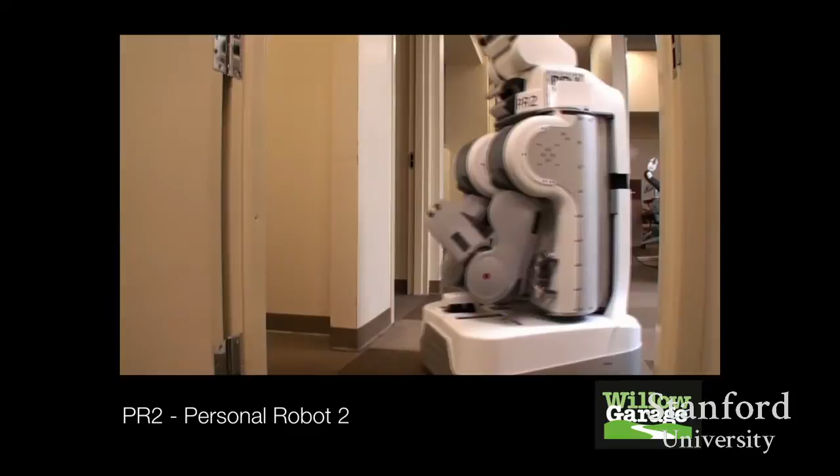This is the PR2 in action, a video probably about 4 years old now, showing at the time the visualization of how it was building a map. You can see the navigation. One of the fundamental rules of robot navigation is just don't hit anything, don't hit anybody. At Willow Garage there were dents in the walls, but they were from teleop - it was very rare that the robot would hit something while driving itself. You can see there's a lot of visualization tools.

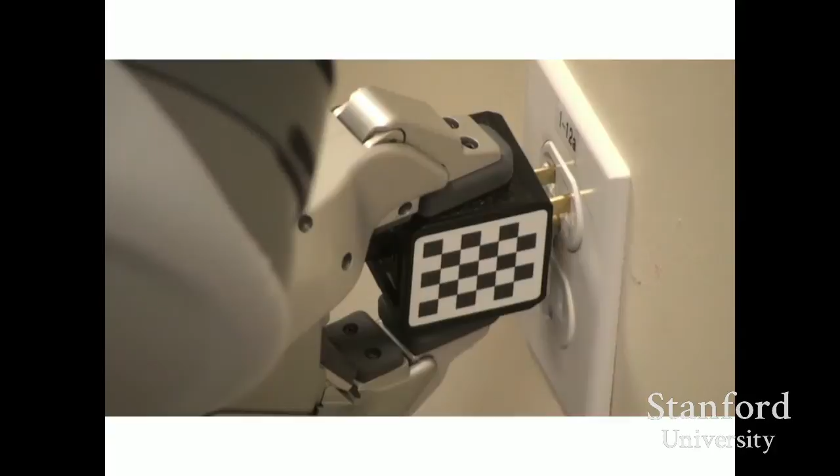The tour de force for the PR2 in the early days - we called it milestone 2, after we got the robot navigating - was getting it to plug itself in. This is not the right way to charge a robot; you should build a dock, that's the engineering solution. But if you want to prove the arms can do a very precise task, this is kind of a cool thing to do.

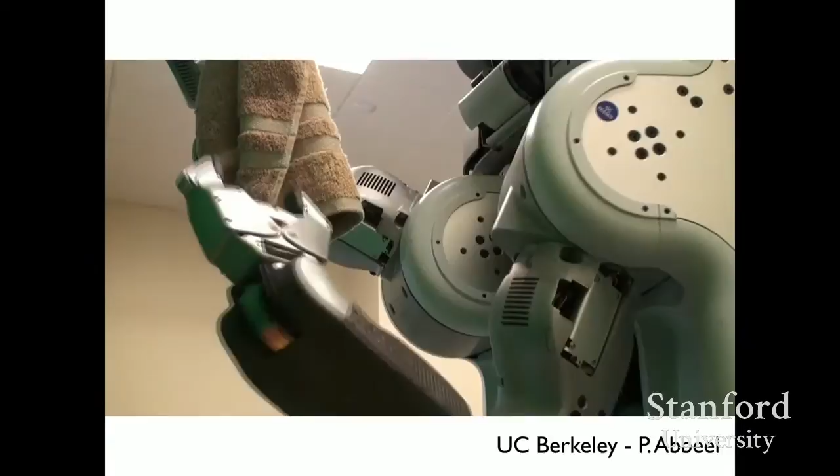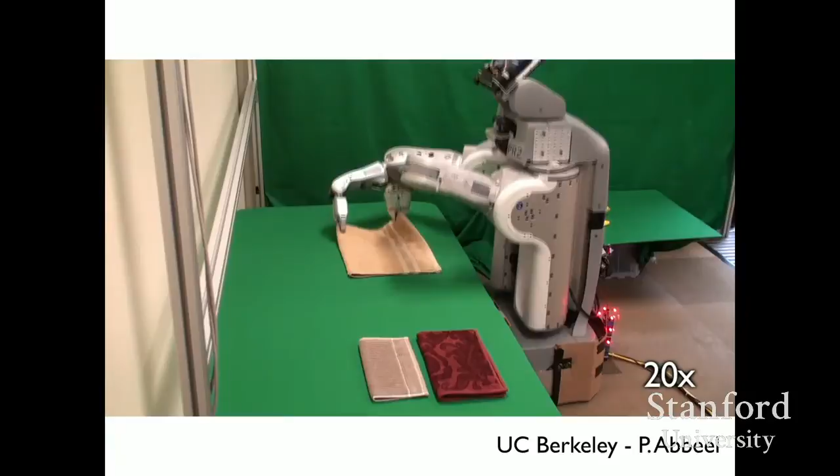That was the beginning of PR2. When we had a working prototype, Peter Abbeel's group at Berkeley got the robot to fold towels. This is how they did it - you get the robot to pick it up by a corner, and eventually do this. If you want a lot of hits on YouTube, which this video did, you do this move right coming up here - you just go like this, and people go 'wow, that's cool, it must be human, it knows to get the things out.' So this was a pretty cool thing.

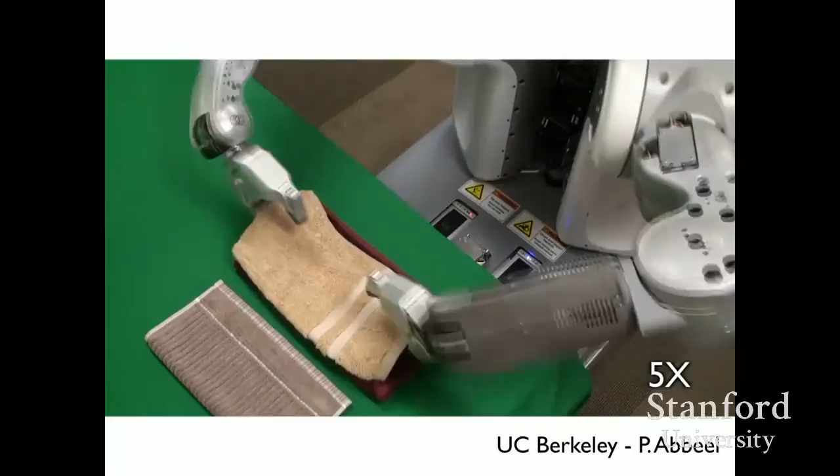This robot - one reporter who covered it said it could do 25 towels a minute. That was inverted; it actually did 1 towel every 25 minutes. It's a pretty important difference. Peter's since gotten that down to under 4 minutes per towel, which is a huge improvement compared to 25, but still not taking anybody who folds towels for a living out of work.

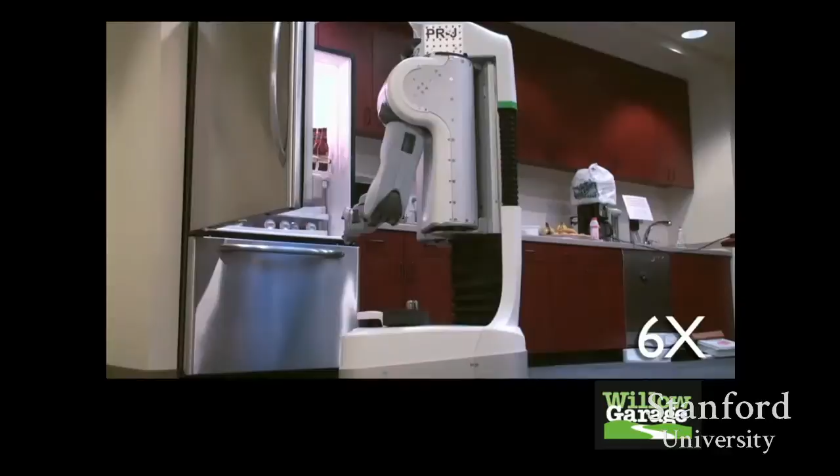This was another tour de force at Willow Garage. Once we had the robot and the first version of the robot operating system, we said, can we make it do the thing all graduate students want - get a beer out of the fridge and bring it to me. They made a little web interface where you told it what kind of beer you wanted. If you pick a Guinness, it picks out the Guinness on screen. If you pick Bud Light, it pops up a dialog box asking 'are you sure you want Bud Light?' So it's a very smart robot.

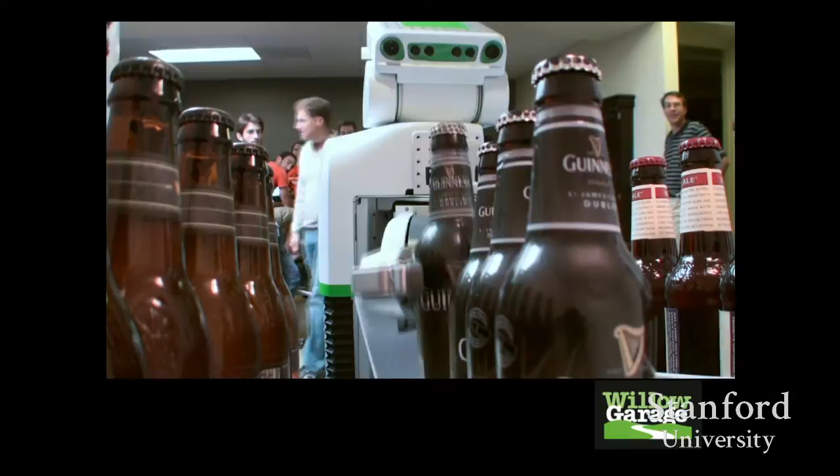Then it uses the navigation technique - they actually added a little cup holder there. The cool thing about this was it was a 1-week project, 8 engineers. So we take the underlying platform and say, go do this. We did another project, which I won't show the video right now, called Pool Shark, and you can see it on YouTube.

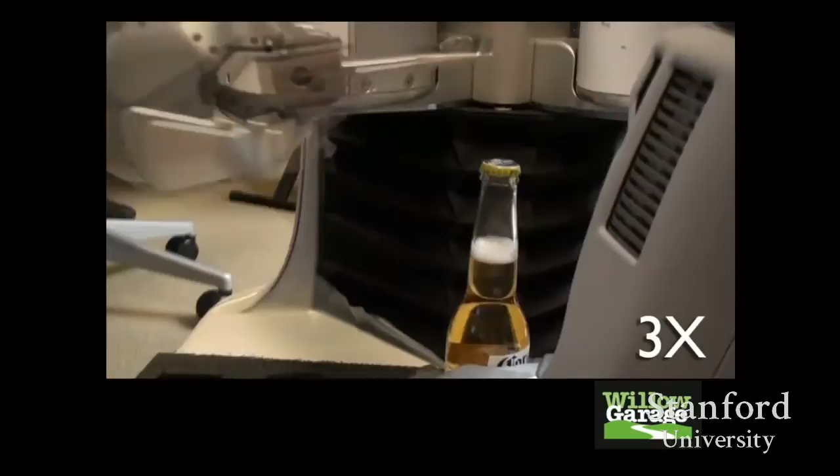Pool Shark was another one-week hackathon: get the robot to play pool in a week. They used an open source pool physics simulator to do that. Pretty cool. They also got Coors Light, or Corona I guess - Corona's okay - and they made a mess. That was a cool thing there.

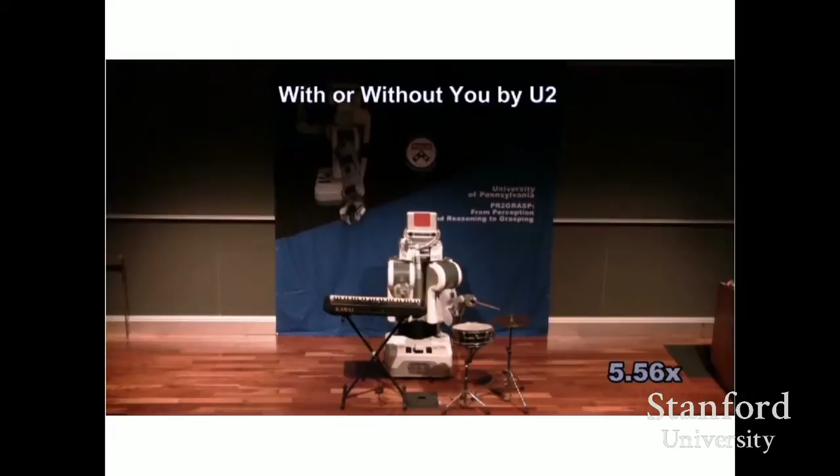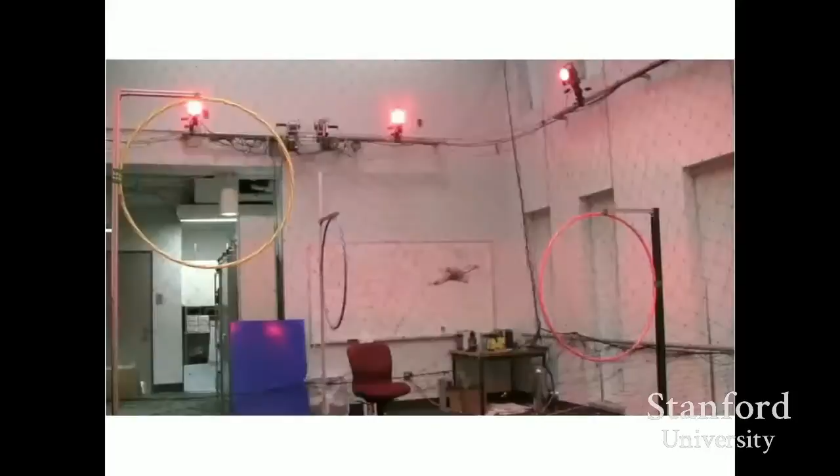This is all built on software called the Robot Operating System. You'll see a bunch of these - this was a weekend project to get the robot to read MIDI files and play, at University of Pennsylvania. You see a lot of different robots here. These are KUKA arms on top of an obviously homemade base. These are early drones at University of Pennsylvania doing some cool things inside a motion capture system so they could get position.

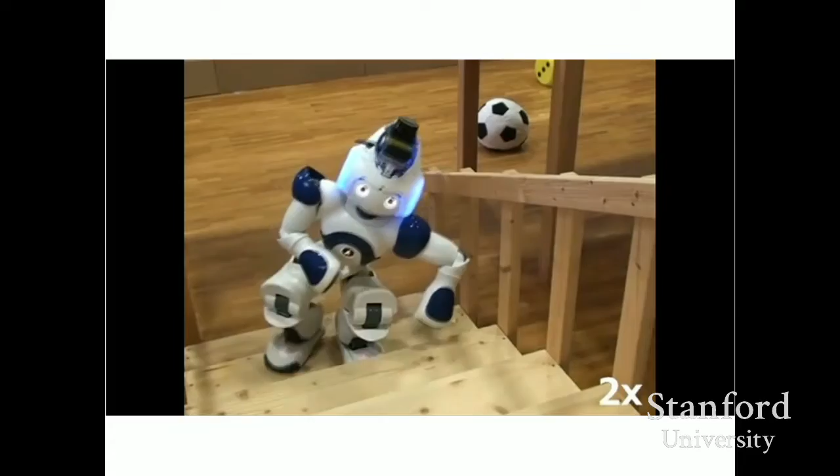This is here at Stanford - Morgan Quigley's building a robot arm. This is that Nao robot I mentioned earlier, but using ROS to navigate. Dancing with a robot out of Germany called the Care-O-bot. This is out of Zurich, robots that go through pipes.

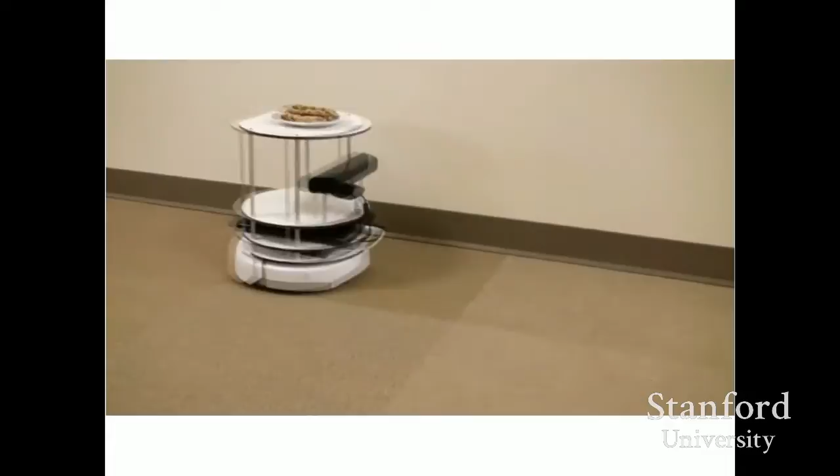This is a TurtleBot, sort of the lowest cost ROS robot that we built at the time. This is Lego Mindstorms, but you had to run ROS on a separate computer, not on board. And this is a robot at Georgia Tech. So you get the idea - there's a lot of research robots, they look a lot different, and what's cool is that this robot operating system works on a lot of them.

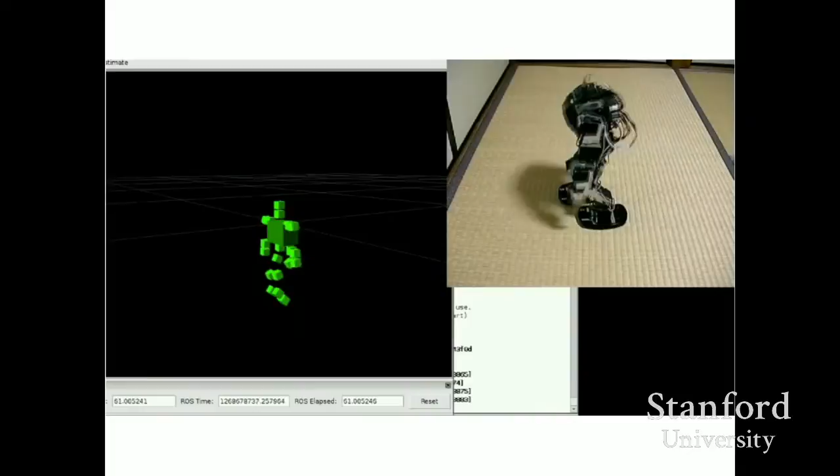So what this means in terms of the point today is that robots are coming online and becoming available commercially for the first time around people. It's not that there haven't been any, but there haven't been very many. I think that's due to technical enablers - ROS, free software that lets you get started.

So we're - Savioke, I'll fast forward a little bit. Savioke is now 16 people, we started as 7 people. We've been in business for 15 months. We've got a robot in the field and 2 more. We built hardware, we had software, we got the thing working in a year, right? We were at 10 months for the first deployment. That's incredibly fast.

And that's due to ROS, right? That's due to the fact that we can start with a working code base and improve the parts that need to be improved. It's also due to robots coming down in price - that's another reason they're becoming available. The PR2 would be cool, you could have it deliver beers in restaurants, it'd be awesome. At $400,000 a pop, it takes a lot of creativity to justify how you're going to make money at that in a restaurant.

And then cheap sensors is a big deal. We built the PR2 - we put a stereo head and a structured light sort of projector that put out a light pattern, so you could do essentially what the Kinect does. But we built that custom - that was probably a $4,000-$5,000 BOM part of the robot, very expensive. The Kinect came out for $150, and they sold millions and millions of them. That's the good news. The bad news is Apple bought PrimeSense, which makes the Kinect, so they're not as easy to find now. But the technology is coming to the point where it's now consumer products.

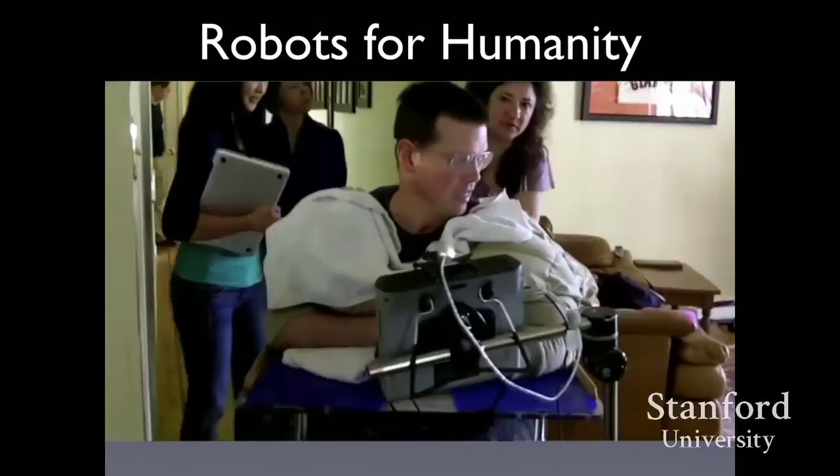This is probably the best thing that came out of Willow Garage in terms of the robot. People ask all the time, what's this robot for? This is a man named Henry Evans who called us up and said, I saw your robot on CNN, and I think it could be my external body. Henry was a CFO of a Silicon Valley company, had a brainstem stroke about 11 years ago now. And he just called us up.

He types using his head on a keyboard, or he can use that board that he uses to speak to his wife. But here's the clip that he saw on CNN, and he said, hey, can I get access to one of those?

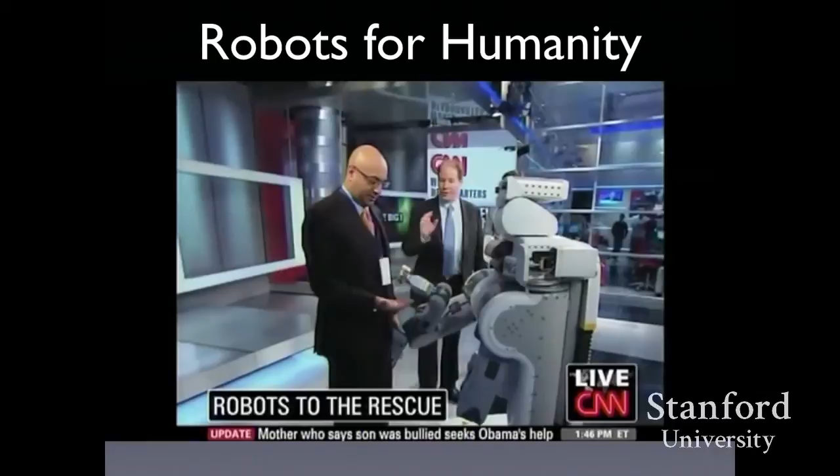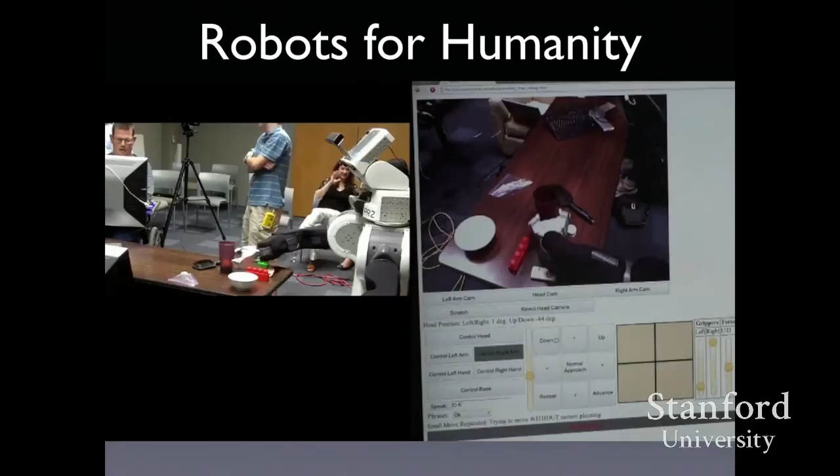And so we started this project called Robots for Humanity, and this is the interface that was built. He actually used PowerPoint to draw an interface, said this is how I want to work it, and then sent us that. We sent it to a Georgia Tech grad student who built the interface to control the robot, and then Henry went and used it. The first thing he did with the robot was turn it on himself, as you can see here.

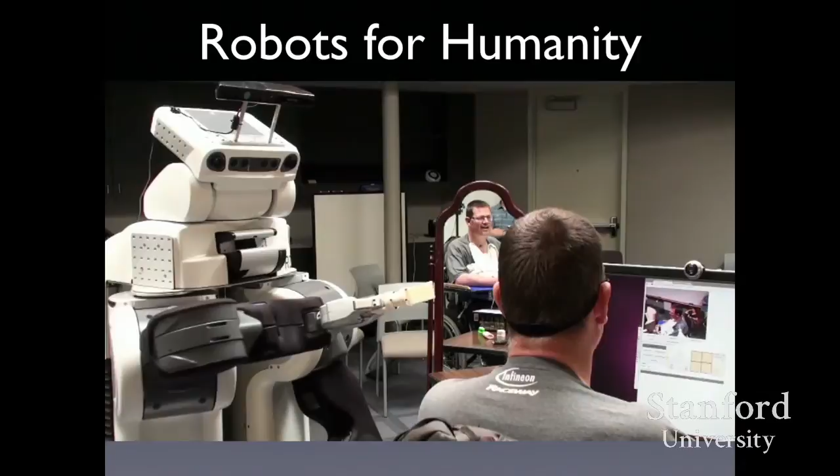And this is a recreation. The first time he didn't have anything in the robot's hand. He put the hand right in front of his face, and we're holding the run stop. What's he going to do? And he scratched an itch on his nose, right? It was the most touching moment.

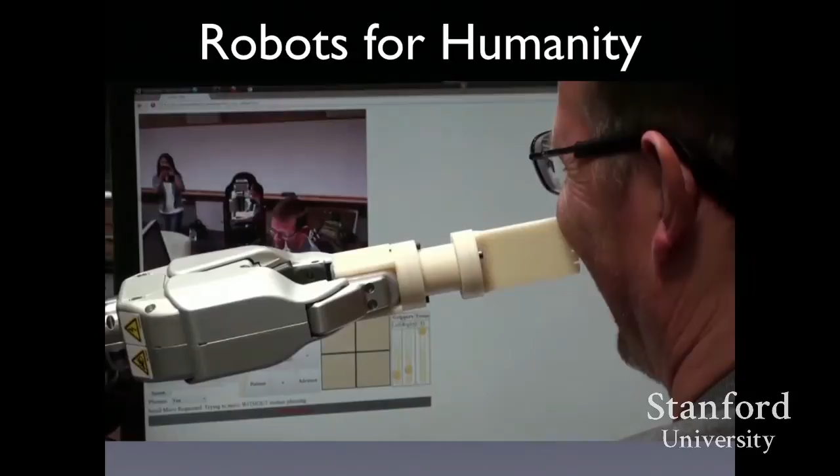Then we said, well, what else do you want to do with the robot? And he said, I want to shave myself. And so you can see here, there's a force torque sensor attached to kind of a razor head. That force torque sensor tells you how hard he's pushing. And so we had his wife shave him the way she normally does, and he shaved himself. He pushes 10 times harder, right? So no wonder he wanted to shave himself. But it's also just about his dignity and being able to do things for himself.

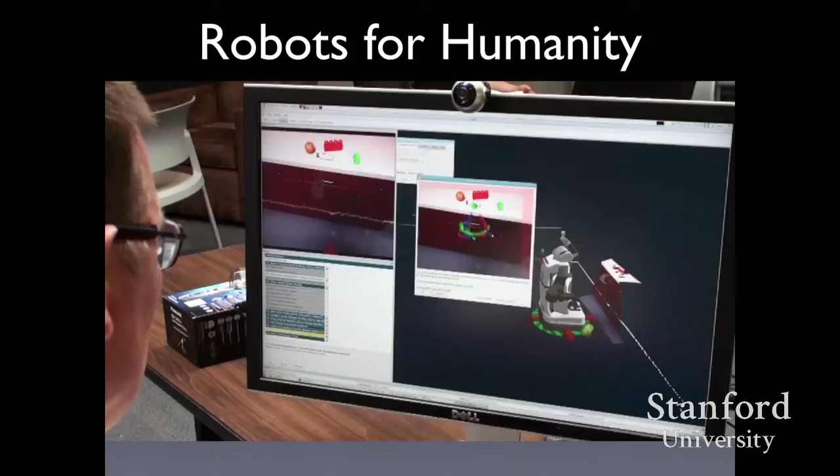So this is him using the robot from a distance. He's in one room, he cannot see the robot now, his eyes are off, he's in another room. The robot's opening a drawer. He's watching it through video feeds, and he's using it essentially as a remote body.

And later we took this robot to his house. He drove it across his home, opened a drawer, took out a towel, brought it back, and used it to wipe his face. Imagine for somebody who's mute and quadriplegic, who can't basically do anything with the world except move his head around, suddenly he's able to affect things.

There was a clip just there of him handing out candy to trick-or-treaters. We did a thing here at Stanford Shopping Center. So this is a project that, as you can tell, I'm passionate about and drives me.

One of the first things we did when we started Savioke, as we were exploring what our project was going to be, we funded a project at the University of Pennsylvania, and they built this robot called ScratchBot. They didn't call it ScratchBot, Henry calls it ScratchBot, so I use that name. This is a carbon fiber robot arm, very lightweight, counterbalanced, designed to be something that's not going to kill him while we're not looking. It's an important feature.

And he uses it basically to scratch his itch, and it's mounted to his table. As you can see, this is his bed at home. He uses it basically every day - he estimates he gets an itch 20 times an hour, something like that. So you can imagine how long you can wait before you just want to scratch. He has some signal with his eyes that he uses for his wife to scratch, but it's not a favorite thing to have to ask for that. He's much happier doing it himself. And you can see he really goes at it.

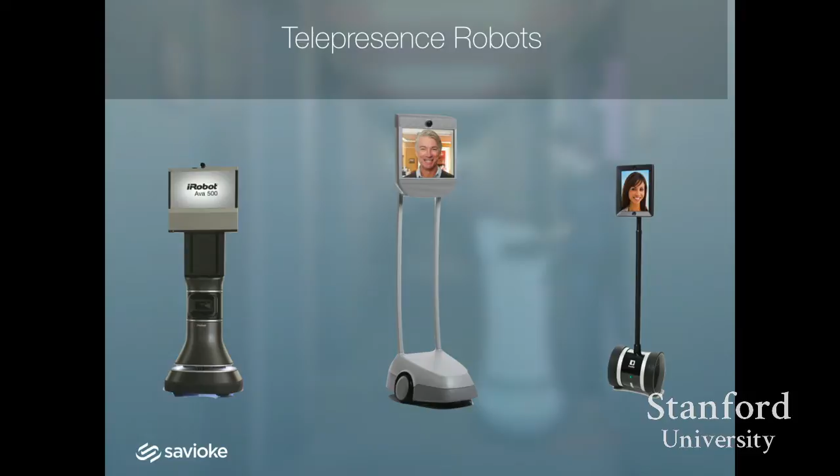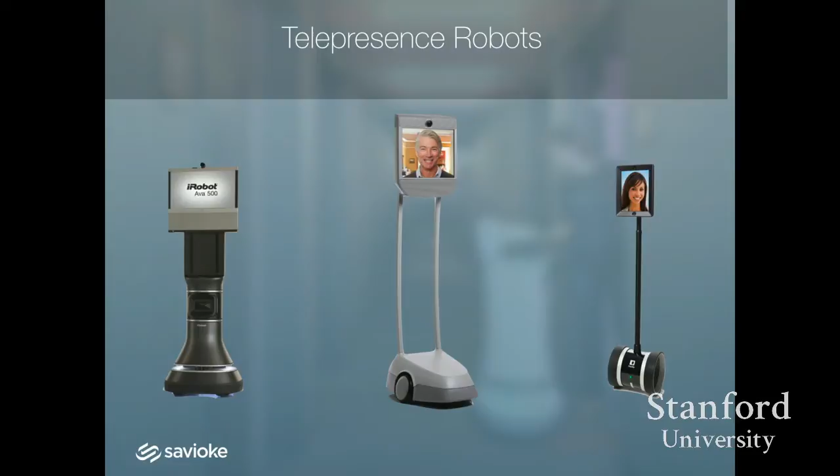And Double is in this space. Double is interesting because it's self-balancing, so that's kind of interesting and scary. Also it's very cheap, it's only $2,000, so that was a really interesting price point, and they've done very well.

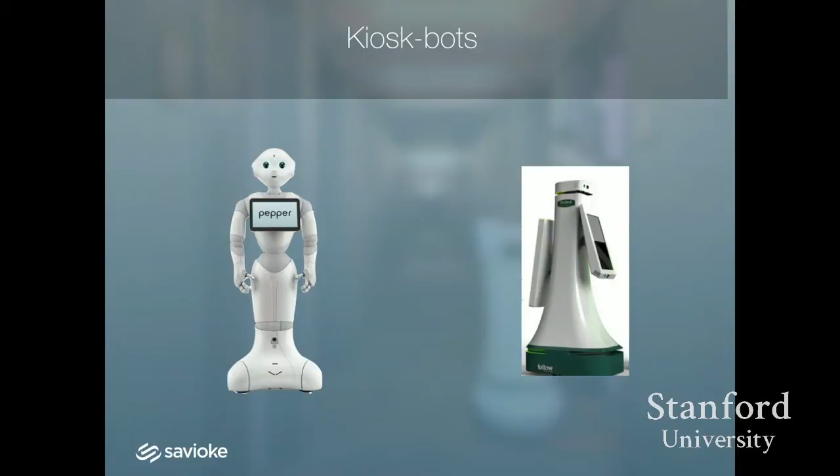Another class of robots, as robots are moving into the service industry, there's another class called kiosk bots. I don't think they call themselves that, but maybe it'll catch on. One of them is called Pepper. Pepper is a robot actually out of France, from a company called Aldebaran. I showed you the Nao earlier, and unfortunately I have a clip for this, but I have to be on the network, and I'm not. So you can look up Pepper on YouTube and see a video of it.

What's interesting about Pepper is that it moves very gracefully. It's got hands, but it doesn't really hold anything - it's not designed to pick things up and manipulate them. It's designed to be a kiosk, sort of stand there and greet you when you come into a store. Osh, the Orchard Supply Hardware, which is part of Lowe's, has introduced the OshBot, which is similar. It's got a tablet on the front and a tablet on the back, so it can advertise all the time, no matter which way you're facing, I guess.

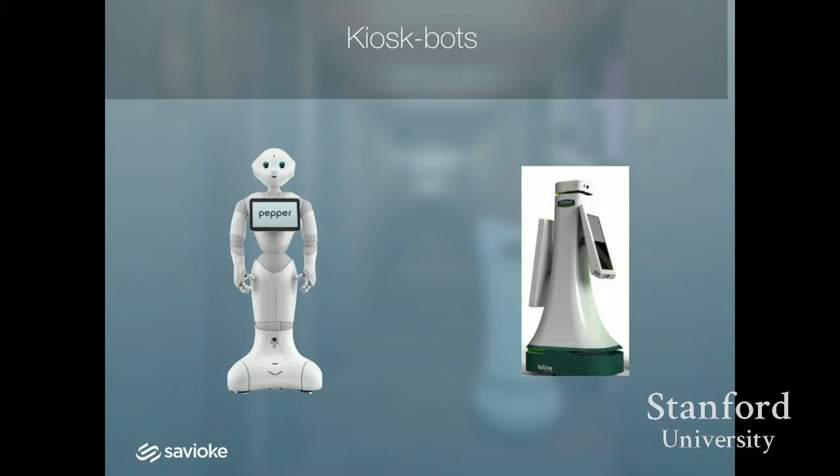And you can interact with it, and they're working on various AI techniques to let you interact and find things in the store. How big is it? The Pepper robot that moves so gracefully - I think it's like this big. I actually haven't seen one in person yet. I know the Nao stands on the desk, it's about this tall, and then the Pepper's like this, and then they're building one that's bigger.

Aldebaran's run by a guy named Bruno Maisonnier, and Bruno is very big into humanoid robots and believes that robots should be social. There's definitely a school of thought - not universal - that making robots more social, more humanoid, is a good thing in some way. There's also a school of thought, closer to where I am, that you make robots useful, and if you make them too close to humans, it gets kind of freaky. So I think time will tell which ones are more popular, which ones get adopted.

I can tell you that the cost of the robot goes with the number of degrees of freedom and number of motors, so if you go with a robot that's simple, you save some money.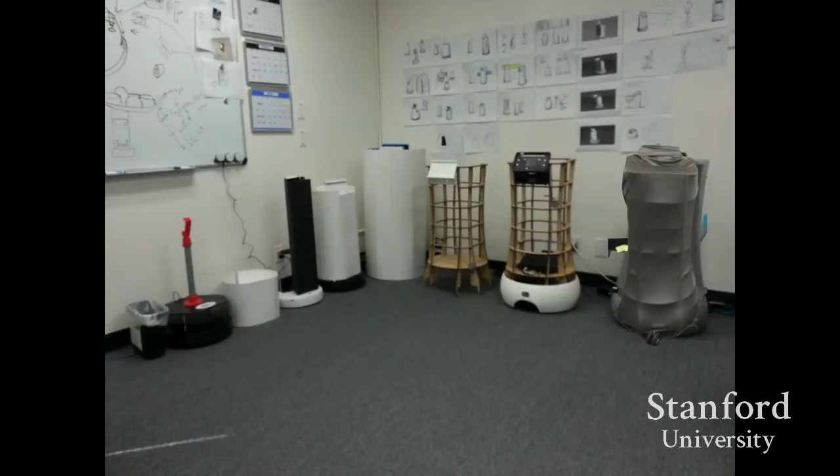So I'm going to dive in a little bit and talk about SaviOne, also known as the Butler. We're working with Starwood, and since August we've had a robot in the field. It's done about 1,400 deliveries, 400 of those to actual guests, and another 1,000 kind of test runs up and down the elevator. We just crossed 100 miles of indoor travel last week. So it's coming along, and we're about to go into 2 more hotels. It's a pretty exciting time.

But this is kind of where it came from—this is where we started. I think this picture was shot sometime early this summer, around May probably. And what you see is a whole bunch of robots that look like junk: foam core, little frames. That's how we prototype.

We built a prototype that was basically a Roomba or iRobot Create with some sensors on it, to get the basic software turning over. Just put some processor on it, then built a bigger one. We put foam core at about the height we want it to be, and mount the sensors up high. Let's test that one. We built this frame.

The frame is cool—you take a piece of MDF 4x4, take it to a laser cutting shop with the right pattern, they give you a bunch of pieces back, you glue them together, you have a frame. You put it on top of a base.

We had this problem of wanting to try this thing out in the field as soon as possible. How are we going to dress it up? So I suggested spandex. We tried it—Adrian Canoso, our industrial designer, wrapped it in spandex, took the picture, and then ripped it off. So we got rid of the spandex and did this instead.

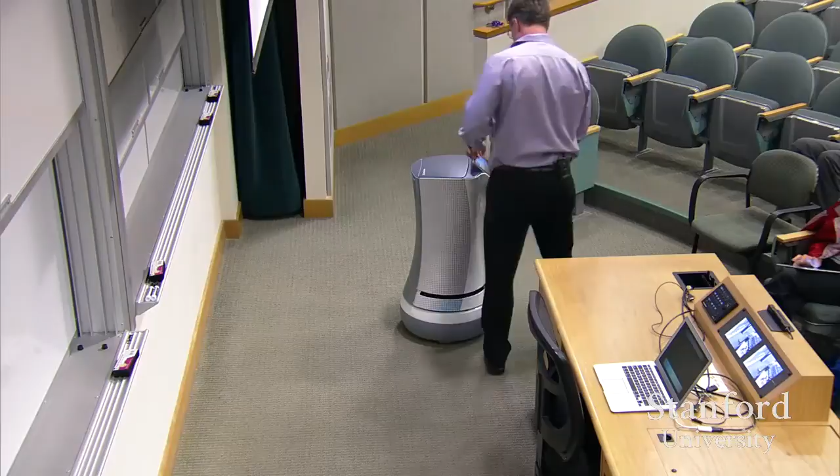And then I have to enter a room number. I'll put room 100 in this room, which is simulated right over there. Then I say load. The passcode is to keep the 9-year-olds from sending it around the hotel if they get hold of it. The room number is sort of the minimal level of interaction needed to specify a location—it's easy to use.

So I say load, and it opens up, and there's a little bin in here. In the current version, this is the road version, but in the hotel version we've redone the bin so it's deeper—about 2 feet by 1 foot by 1 foot of capacity. There's a little tray inside so when you put a toothbrush or toothpaste, they sit up high so the person doesn't have to reach down deep. For the deep bin, you typically put a bag in and pull it out.

So I load it up—I'll put my pen in there. It's not like a magic trick, it'll still be there when it gets to the other side. I say go, and now it says I'm running a delivery, makes a little cute noise, and starts going to its location.

If you're a 9-year-old, you can do this and keep blocking it. If I keep doing that, it'll try to find another way around. It sees that it can't go there, and now it tries again. I messed it up now because this is kind of a small space, but it'll replan and say, alright, now I can get through. This works very reliably in the hotel.

Pretty simple idea. Is it artificial intelligence? Well, it's artificial intelligence from the 80s, right? We had planning algorithms and search algorithms. It's not conscious, I'm pretty sure—hasn't been hit by lightning, so therefore.

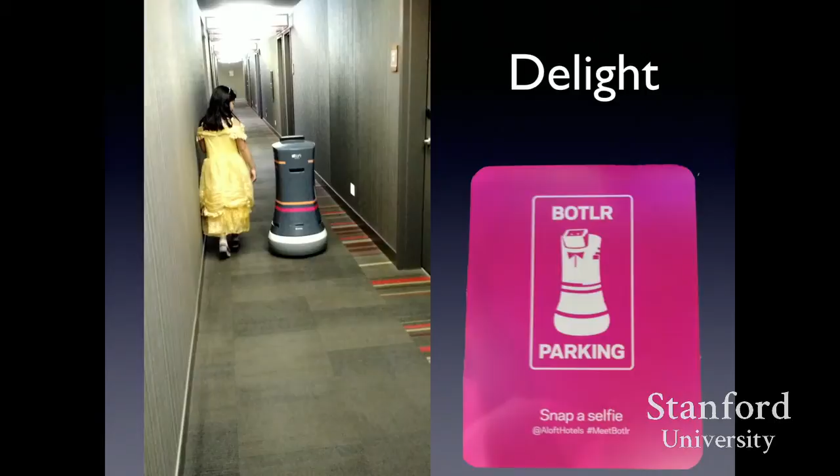And they parked it right in front of this tower of lit-up blocks, called the Aloft blocks. Right in front of that, they put this sticker, this robot parking sticker. So the robot always parks on top of that sticker now, and it says 'snap a selfie.' You snap a selfie with the robot and get the Aloft blocks in the background—very clever for them. So anyway, I'd say we totally underestimated the value of the delight part of the robot. We designed it for utility, for return on investment, keeping the cost down and making sure everything was valuable.

Starwood did that video I showed you, with a whole marketing campaign around it, and had something like 1.3 billion media impressions in the first month. So it's pretty good at capturing people's imagination. I think what Andy said earlier, it's really about somehow robots just capture your imagination.

I'm a software guy, I came out of computer science, but what I found is whenever I'm talking about robots, people don't care about the software, they look at the robot. What it does is interesting, but what's underneath, people don't care as much about. So it's much easier to show. I can show you videos of all kinds of robots using ROS, but showing you video of ROS would be really boring, except for the animations, I guess.

There's lots more robots, and I won't go through all of them, I'm going to save some time for questions. But drones, obviously, huge right now - that's the Amazon drone, Google has a drone as well, and there's 3D Robotics doing drones for agriculture. The Google car we've already talked about a little bit, and there's this security robot called Knightscope that's come out. I could go on for a long time talking about lots of different robots out there, but instead, what I thought I would do is take these as examples and go back to my first list of how you distinguish robots and see how they fit.

So back to the 10 ways to compare robots, let's just go through them one at a time. Moving versus fixed: most robots, when you think about industrial robots, they're fixed. But most of the robots that we talk about and that are coming up now are mobile. So that seems to be a pretty important characteristic of a robot - would rule out the microwave and the dishwasher and things like that.

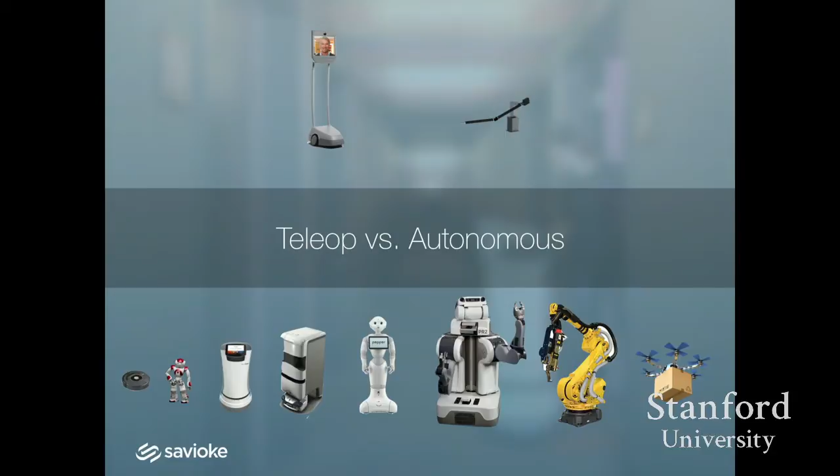Then teleop versus autonomous. You saw when Henry Evans, the quadriplegic, used the PR2, he's using it in teleop mode - actually what we called assisted teleop or supervised autonomy. He's doing something, but having the robot help him do it as well. A good example: when Henry wants to shave, the first version had Cartesian controls - you move the razor up, down, left, right, and bring it over. But then you have to angle it - there's six degrees of freedom you need.

And it's not easy to think in 3D when you're facing the other way and get this thing done. How long did it take for him to get frustrated? He's got amazing patience - think about living with what he's living with for 10 years.

What we did was the Georgia Tech students modeled his head as an ovoid, then said, given that, when you click in the picture, let me calculate the normal to that. This is something real easy for robotics people - just take the normal. Now I'm going to bring the robot there, stop one centimeter from the surface, and now Henry can just reach over and scratch, getting it exactly the right place. So a little bit of programming, a little bit of human intelligence to build really clever models, makes a big difference in how the robots can be used.

Finally, uncontrolled versus structured environments - I think that's obvious for the service industry. There have been robots for probably 20 years doing mail delivery in offices, but they're following a trail - literally a trail. They have special ink they put on carpet that's invisible, but the robot can see it, and it just follows that, basically line following. The problem with that approach is, of course, when somebody puts a box down in the middle of the path, the robot just stops until somebody moves the box. So it's nicer to really operate in an unstructured environment, and it's relatively straightforward to model it.

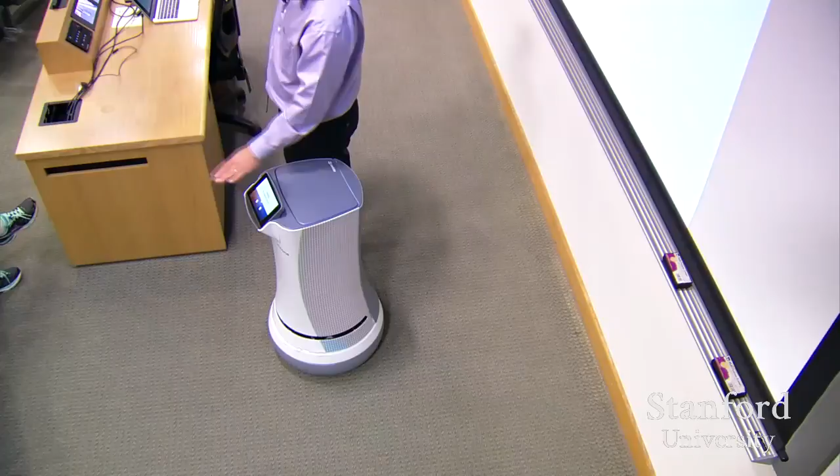What are your thoughts on these kind of robots in senior care homes, particularly regarding the user interface? In the next generation of the hardware, we've slanted the tablet back a little more so it's easier to reach over if you're in a wheelchair. This robot is close to doing one thing in senior facilities, elder care - it'll do the same thing, delivery. It doesn't solve the myriad of things robots could help with in elder care; there's people working on that in research all over the place. It's not going to solve loneliness, it's a lot of classic problems. But what it does do is take a load off the staff and let them spend more time with the residents - that's how we think about the value of this robot there.

Take a load off the staff, and then the bean counters will fix that - well, the bean counters may fix that, but that's their option. We do the same thing actually in the hotel when we talk about the value it brings. A lot of the value is in letting you rework the process of the hotel to do things more efficiently and potentially add services back. Because one of the problems hotels have is labor costs go up, revenues don't go up quite as fast, and you get this squeeze - and the response to that squeeze is to cut services.

So there's a lot of services that hotels used to routinely provide. I don't know if you've noticed, but minibars are going away. Minibars turn out to be a horribly inefficient thing. It's bad for you because you have to pay like $17 for peanuts, and it's bad for the hotel because they have to keep track of how long those peanuts were in your room. Since they're $17, they never get sold, so they have to go around to all the rooms and check the date on the peanuts. That's incredibly labor intensive, so they have to raise the price of the peanuts, and it's a vicious cycle.